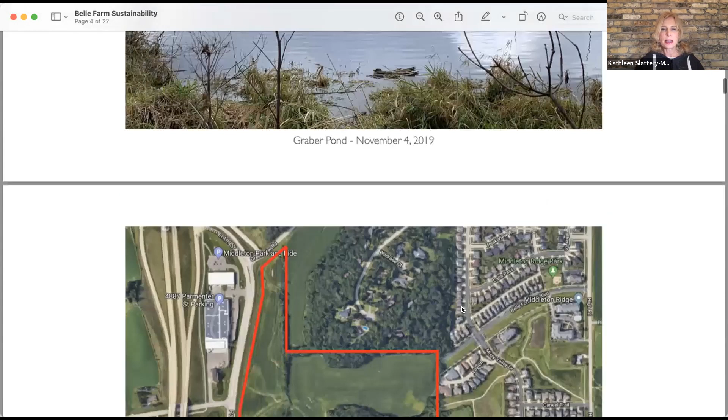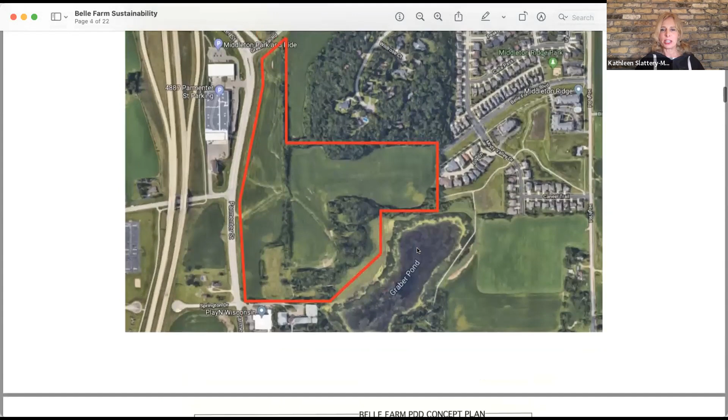The land overlooks Graber Pond and the wetlands - it's beautiful, 44 acres, and sits on the north end of Parmenter Street, right next to Misty Valley subdivision. When we approached the land, we approached it first with good land use in mind, and with that sustainability piece.

One of our top goals was to keep 50% open space, which we were able to achieve. Although we're approved for up to 745 dwelling units, with most of that density along Parmenter Street, we really tried to be conscientious about how this was laid out, because we believe in density and going vertical. We know there's a housing shortage, but wanted to approach that without covering the earth.

From that sustainability standpoint, we were looking to do compact development and density clusters, leaving more of the earth available to drink and to breathe and to grow.

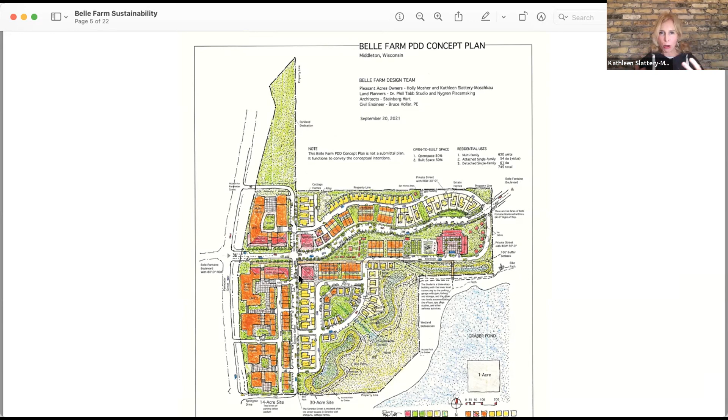And so I'm going to keep moving here.

The goal from a sustainability standpoint was to create a walkable, complete, bikeable neighborhood that promoted connections where you didn't feel like you had to get in your car to do everything. We designed it so everything you needed was right here: coffee shop, grocer, restaurants, pharmacy, daycare, so you only drive when you want to, not when you need to. We've also built in a lot of workspaces throughout the neighborhood for anyone who doesn't want to work from home but has flexibility because of their job given what's unfolded with the pandemic—there will be lots of opportunities to work right on site.

We've incorporated a lot of walking paths and trails, and it will be an exploration. We tried to approach walkability not just in terms of sidewalks, but lots of trails and ways to explore and commune with nature.

From an energy standpoint, we'll be having geothermal. Each single family house will be required to have geothermal, and we did a geothermal feasibility report on the entire 44 acres. At first we looked at doing a complete campus-wide system, but given this specific land and how our development laid out, each home will have its own boring. Some of the townhomes and missing-middle housing may be able to share a boring—we're still exploring that.

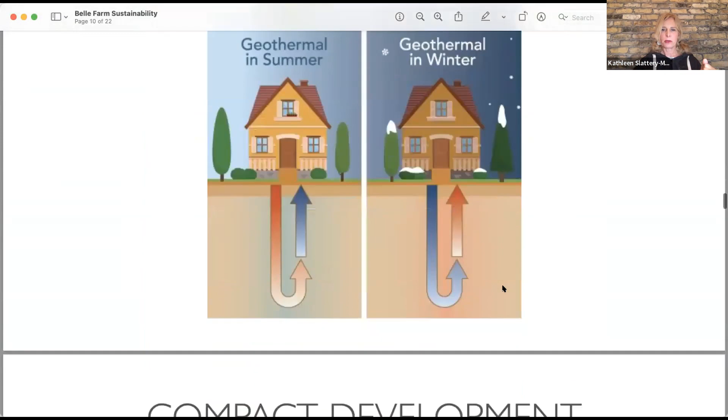Geothermal will handle heating and cooling, serving us both in summer and winter. That compact development aspect leaves more of the earth open to drink, breathe, and grow, but also gives more opportunity—from a mental health and spiritual perspective—to commune with nature and interact with the world that's not built.

That's why I think when we're really mindful about land use, we don't have to cover all of the earth to solve issues like affordable housing. Again, just a peek at compact development, small footprints.

From a stormwater management perspective, that 50% open space is a big part of being able to do really good stormwater management. This has become a personal passion of mine—I find it fascinating, and I think we should all know this stuff and work with it better than the general public has before. By keeping 50% open space, there's less impervious surface, less runoff, and more ability for infiltration. I'm speaking to the choir here, so I'll move through this pretty quickly.

With Belle Farm, we're doing both a robust site-wide system and per-lot water management. Each single family house will have its own stormwater management plan, showing how they'll handle water in a way that meets our development's needs so we're not sending water downstream. Part of the reason for doing it per building, not just site-wide, is that we want everybody to have a hand in it and a sense of personal responsibility for water.

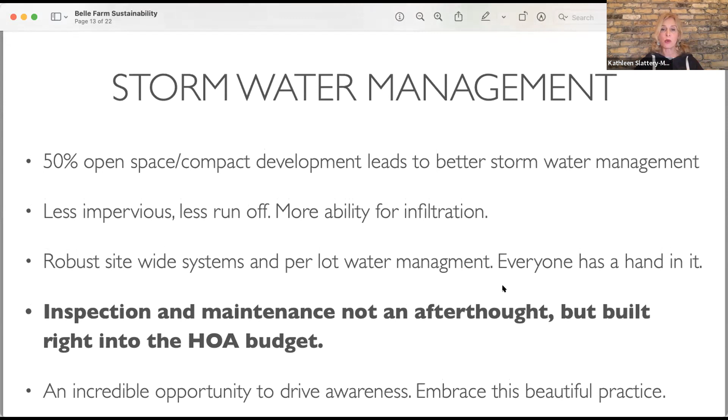I see the whole way we're approaching stormwater management as an opportunity to drive awareness. It's a critical topic, and as a developer, I want to embrace it, not push against it. This is really critical, so the role of the HOA here is key.

We're looking to the HOA for a lot of different things, but the sustainability guidelines and design guidelines will be built right into the covenants. You will not be able to build a home here without geothermal and without solar. And in terms of ongoing maintenance of the site-wide systems, we'll have a robust HOA line item.

Each single family home doing its part. Each single family home will have solar power storage and geothermal, and each one will have its own stormwater management plan.

Passive design considerations we're working through with architects, and all of this is being considered, different design considerations coming in so we can be more efficient in how we're building, in terms of how the buildings lay on the land, working with and around the sun. Sometimes we've got to work around it. The building envelope, making sure we're not losing energy through windows.

Some of you have heard me say this before, but the idea of building in a high quality way overall, even separate from the sustainability measures like solar and geothermal, just building in a high quality way matters.

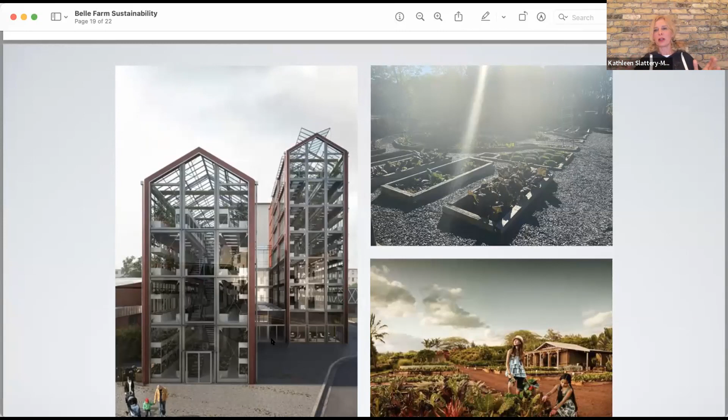But also from the standpoint that I see this as the future of food. With the Netherlands, they're growing so much food on such little land. I think they're the second highest exporter of food in the world on very little land because they've gone to this vertical farming. And it's a way to keep more of the rest of the land open for biodiversity and rewilding and not spraying with fertilizers and pesticides and all of that. So if nothing else, it'll help feed our development, but it'll also help show and serve as an example.

So some of the constraints I face as a developer who values sustainability, sometimes, as I'm sure everybody knows because we're all up against it, is that there are competing forces within the city committees that make it hard to stay the course that you wanted to go from a sustainability perspective.

There's also, from a developer standpoint, this tension between affordability—and that's not just in terms of profit, but also making sure that we can keep housing affordable—and then the upfront costs of doing the right thing. But the irony is that the cost of doing the wrong things is immeasurable. And so I think we have to find a way to work through that tension in a better way.

So I see some of the opportunities in that, in order to develop in a sustainable way, it's going to require partnerships, that there's no one entity or individual that can do this on their own. Me as a developer on my own, I can't achieve all this by myself. You as the city can't achieve it on your end. Individuals can't, third parties can't.

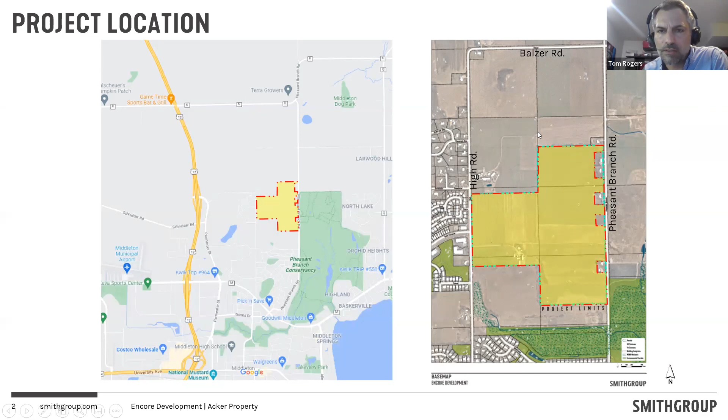It's bordered by Pheasant Branch Road to the east and High Road to the west. It is farmland to the north, and there's a little parcel to the south with some wetlands as well. As part of the city's land use plan, it is in the planned neighborhood area just to the west of Pheasant Branch.

You can see the site outlined here in the red dashed line, and this zone is all indicated as planned neighborhood. We did look pretty closely at topography and stormwater, especially as we considered how everything laid out on the site. One thing to note, there is a high point in the north part, and there's a pretty distinct ridge that goes through, mostly falling off to the west and then falling off to the east, making its way down here.

We really took that into heavy consideration as we laid out the homes, roads, and building lots on the site, paying close attention to stormwater. This is just some information on the steep slopes. It's generally a pretty flat site, most slopes are less than 5%, so it's pretty easy to work with. It's rolling farmland.

What we found later in the year when we started on the project is there's a location in the southeastern corner that we think is potentially a wetland. That has not been officially delineated yet because the ground was frozen when that happened, so we'll be doing additional exploration, but our suspicion is that zone will be wetland there, and we've been designing around it.

The only existing structures on site are the existing farm that's here. There's a few out parcels that you'll note as we move through this process that are existing homes on Pheasant Branch Road.

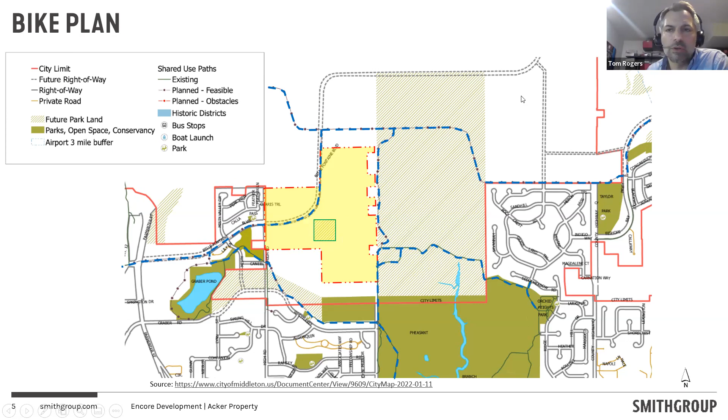This shows the overall location of the future planned bike paths as they go through the site on Bellefontaine and then to the north of the site on the bike map. You see those couple outlots as well. There's some future park land that has been planned as part of this area, and we've incorporated that into our site. There's some existing utility information—it's well served by utilities on the west side in both cases. If you want, I can go back to those slides, but I'll skip over for the better part of tonight.

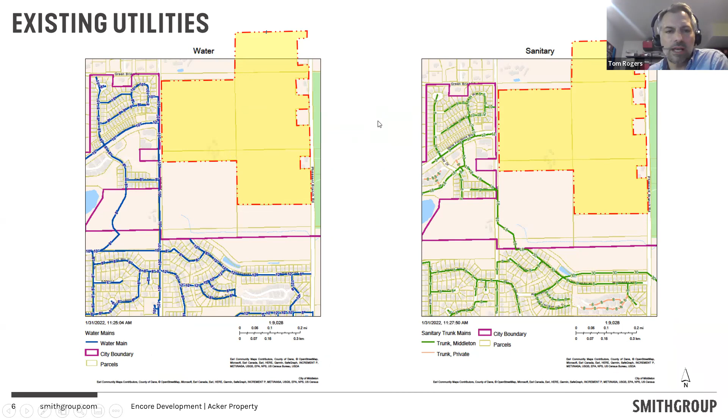We wanted to make sure we had a mixed use and a mix of housing types, so you'll see a few different things, and I'll go through a couple pictures about what those could be like.

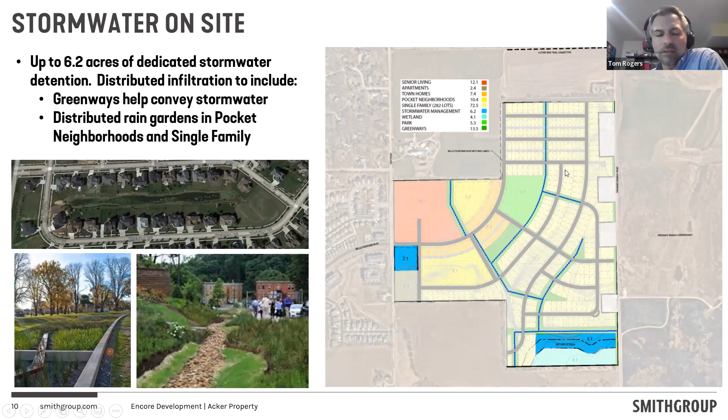So the greenways will help convey the stormwater that you can see. These blue lines indicate where we have trails, but they're ubiquitous with the greenways along the edges. And then there'll be distributed rain gardens in the pocket neighborhoods and of course in the single family homes as well. So that's just a brief overview with that.

I can go back to any slides, or we can open it up for questions and comments.

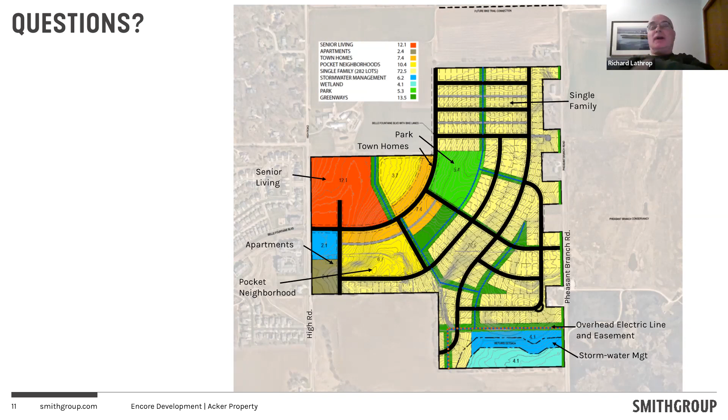Hi, can you go back to the earlier slide where you showed the direction of where stormwater was going? Sure. I'll try not to go too fast, sorry. You can zip through fast. There, yeah.

So on the east is the Conservancy. Deb and I actually did a walk of the eastern edge on Pheasant Branch yesterday, just to get a feel for exactly what you were showing here.

I guess the question is, because you are right next to one of the highest value environments to the city, being the Conservancy, and clearly when you convert open land to a fairly high density subdivision, you're going to have more runoff from all the rooftops and roads and driveways, whatever. And you can see by your map, there's quite a bit of water that's draining down south and then to east, coming into the Conservancy, below south of the parking lot. And then there's water above that.

And I guess the county or somebody has put a new culvert underneath Pheasant Branch Road where that water, if you go north, right, that part up above there, just slightly above, somewhere there's a culvert that's going basically not that far north. Okay.

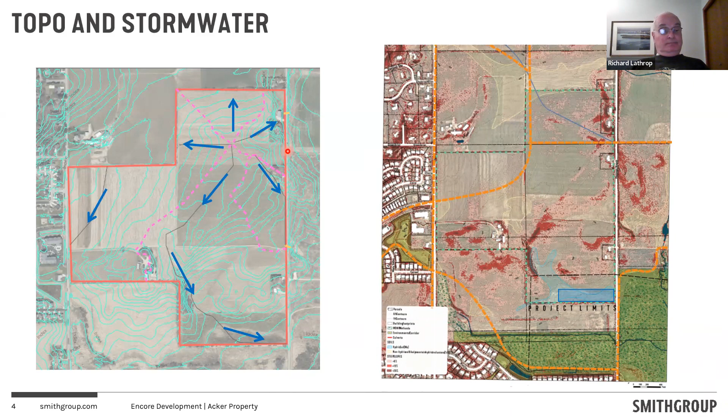Thanks, Dick. We'll go to Deb and then Kermit.

How much open space are you providing in your plan? I have three questions. The last development we heard about was 50%, so I didn't hear a percentage. Also, are you reducing impervious surface, like having sidewalks only on one side of the road, having more narrow streets, things like that, grassy swales, et cetera?

Any solar on the rooftops anywhere? Or do you have your lots oriented so that solar would work, facing south or whatever? And the Conservancy is all native plantings, prairies, et cetera, so in the front portion on Pheasant Branch Road, are you planting any native plantings along the road?

And I guess the last question - Dominic asked about a complete development - are you having any kind of services or amenities that would reduce driving, so people could stay on property and get groceries or whatever?

Sure, I've got a couple answers, and then maybe Chad can wrap up. Overall we have about 30 acres dedicated to a combination of parks and open space, including wetland and greenways. That includes the park and green space. There's a little bit more open space in those pocket neighborhoods as well, but that number isn't included - I think we're at about 29 acres altogether.

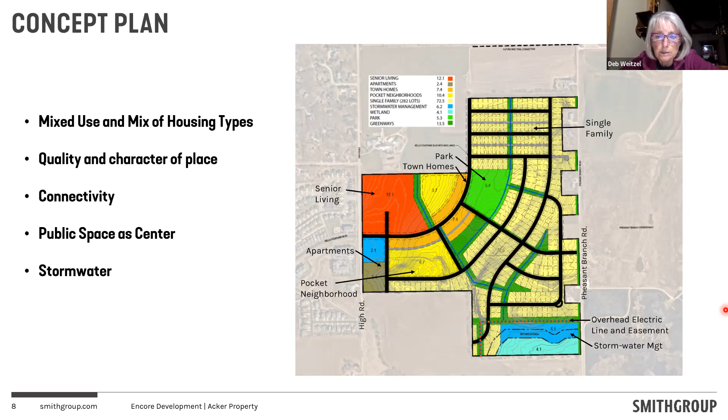I was just wondering, do you have any community gardens planned anywhere? It doesn't look like you do, but that seems to be a need in a lot of different communities. Not planned, but I see a lot of areas that could lend themselves to something like that. Okay, any other questions from the members?